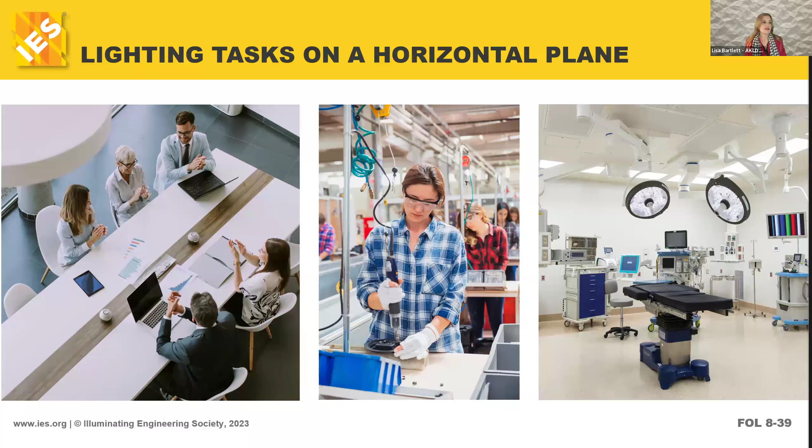But that's not the whole story. So one of the things that is equally important, and in my mind, even more important, is lighting on a vertical surface. Last week when we were lighting up the walls, and if you recall, we were doing the test of the wall wash distribution that was slightly softer, sort of smoothed out the masonry a little bit, versus the grazers that had that really sharp rake of light that really popped out the texture. Both of those were providing vertical illuminance.

And our eyes do perceive light on vertical surfaces first, because what did we evolve doing? Looking out and scanning at the horizon line, looking for game, looking for whatever food we could collect, looking for something that we wanted to run and avoid. So that's what tells our eyes what's brightest first, is what's on a vertical surface.

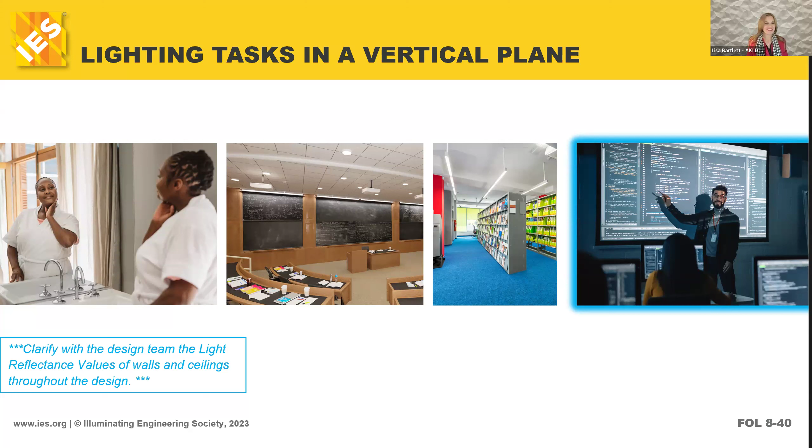Come on, PowerPoint, you can do it. There we go. All right.

Last week I had wanted to mock some things up, but this is something that you can do really readily at home. Next time that you have a magazine, if you can grab one, hopefully it's nice and glossy, take it and take your cell phone flashlight and just do a demo where you turn on that flashlight. I'm going to turn mine on, turn on the flashlight and aim it at the magazine.

Now, who's played pool? Has anybody played pool? Good at bank shots? Yes, I see some. Yeah, why am I not surprised? I thought this might be a crew that would know the old angle of incidence equals angle of reflection rule that is best learned through playing pool. Same thing applies to lighting. So the angle of incidence is the angle of reflection. The exact same thing you're using for bank shots is exactly what we use to think about the way that lighting is reflected off of surfaces.

When we have a glossy surface or a light colored surface, if we have light that is, and hopefully you can see my mouse, bouncing off of a bright surface and into the eyes, that's going to be really uncomfortable. You can test that yourself by holding your cell phone at different angles and seeing where you get that reflection off of a magazine. I encourage doing this because anytime that we're lighting task surfaces, we need to think about that angle of incidence equals angle of reflection. And it's not just into people's eyes, it's to computer screens as well. Thankfully, our monitors are way better at making sure that they don't pick up the direct reflections of light, but we want to be thoughtful.

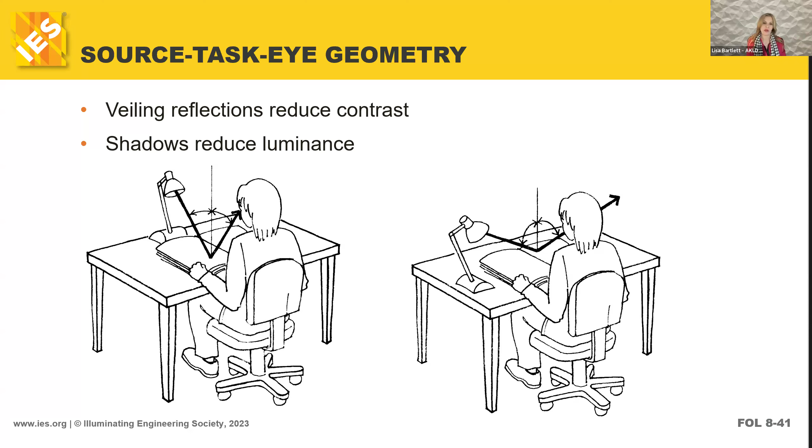Now we get into the meat of it. Last week, I issued the invitation to study the IES, either the Illuminance Selector online, or if you have the handbook, which would be 10th edition, which, if you're lifting it, you don't have to go to the gym because it's fat and heavy. But there are illuminance tables. Did anybody have a chance to look at these, or has anyone done that as part of their daily course of work? Cool. It's an awesome introduction.

And for those of you, I'm going to pull a screen over. If you have access to the IES lighting library, this is the illuminance selector. There is actually an illuminance selector function. So if your firm has a membership to this, then you can go in and actually search these charts online. And it's frankly fabulous. It's such an improvement over digging through the handbook, whether physically or electronically. But let's break this down. This is really important to know.

First of all, I want to highlight that these are recommendations and guidelines. These are not codes. These are not standards. There is no immediate and direct legal implication like there is with path of egress lighting if you do not provide these light levels. There's a precedent in all of these where it says these need to be evaluated specific to the project, to the user group, the context, the usage, the energy. So always a guideline and a starting point, not a rigid code. So this is actually simpler than it looks.

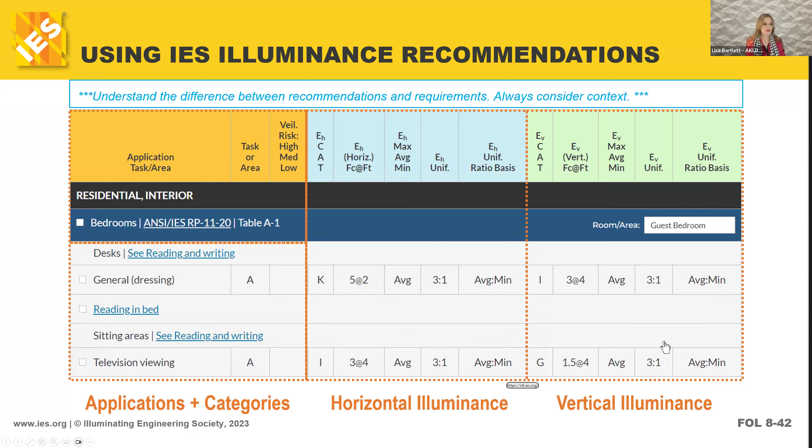And it's interesting that the uniformity and the average to min are exactly the same, which frankly makes total sense for television viewing. We don't have a horizontal task. We don't want a lot of light on the vertical surface because the TV is providing that, maybe just enough that we don't have super high contrast, a bright screen, dark wall. So that's how we read the chart. Is everybody following that? So far, so good? Okay, awesome. So next is your turn.

Let's cruise over to an example. Let's take a look at a library, the general book stack. Actually, let's go down to shelving. That sounds kind of interesting. All right, so who can tell me what our light level is and at what height for the horizontal surface when we are at shelving? About 300 foot candles at 3 feet. Good try. If this was metric and this was lux, you would be correct. This one is in foot candles, and you've probably seen this chart previously in lux, so I have to check myself on that too. So 30 foot candles, you are correct with 3 feet.

How about for the vertical surface for bookshelves? What's our target illuminance level and at what height? It's a little tricky because it says TS, right? Like, what the heck is TS? That's the task surface. It's basically saying you got to have 20 foot candles up and down that whole shelf, man. You got to read the book spines at the bottom of the shelf as well as at the top. So what does that mean when you're doing that lighting layout and photometrics? You got to look at what's at the bottom, because that's where you're going to have the most light fall off. So if you can hit your 20 foot candles down there, you're going to be golden.

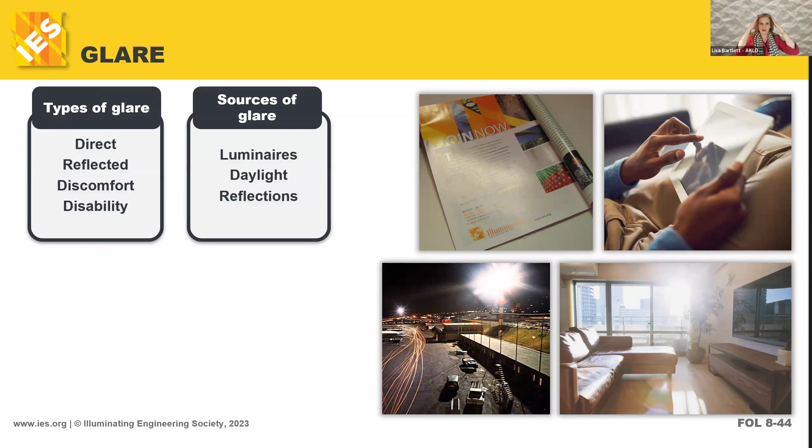Transient adaptation. Okay, who works in RiNo? Who has an office in RiNo, or who lives in RiNo or spends lots of time in RiNo? Anybody? Okay, well, I'm going to give you a field trip to try. And if you're out and about, it's right across from Bierstadt Brewing. It's on Blake. It's at 28th and Blake. There's a multifamily project there.

And they have a parking garage entrance, and the parking garage entrance slopes like this, and they have big surface disc lights on the parking garage entrance. Those lights are off during the day and on at night, and they put out a lot of light. Who knows what's wrong with this picture? Off during the day, on at night, because that's kind of what you normally want to do with lighting, right? If there's enough daylight, you want the lights off, and then after dark, you want them on. Why would it be different in this environment?

I feel like it's dangerous to go from it being super bright to super dark. So there should be, like you said on the slide right here, a transition when you're going into a space, because especially when you're driving a car, that's just dangerous. Yeah, great input, Madison.

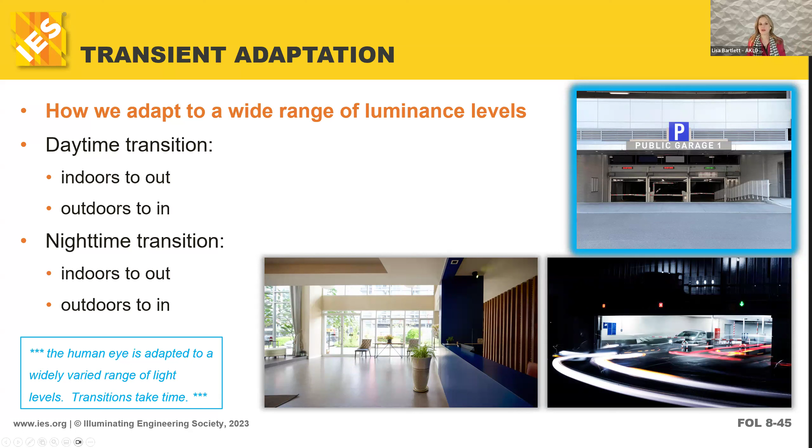So transitions take time, and the older we get, the slower our eyes transition. One of the many indignities of aging.

All right, we're going to keep cruising. As you can tell, I can yak about this stuff at length because it is so fascinating.

Luminance and luminance ratios. Okay, we already talked about luminance, so you guys actually have the clue of what that is. Luminance is the brightness that we see. It's that surface that is emitting light. So whether it's a lens or it's a shade or it's a lamp that is visible or it's actually a source inside, the luminance is that bright light emitting surface. And then on the table, we have the illuminance. That's the lighting on the surface.

So the luminance ratios are super important when we talk, especially like think about a computer monitor. You guys are going to get this in a heartbeat. If your computer monitor is superimposed, or you have a screen, your tablet or your phone, and you've got a really, really bright window in the background, and you're trying to see your screen, or even if you're just trying to look at your phone out in bright daylight, you've got to raise the brightness, right? So that's the exact same thing we have to think about when we're doing lighting.

We need to almost think in the same kind of vocabulary. You want to either lower the shades on that window so we don't have as much luminance, because the bright window surface is actually measured in luminance, or you want to brighten the output of what you're looking at. So brighten your screen. Those things are really, really important. And especially if we're doing any daylighting, the brightness on those, whether it's a skylight with film on it or it's a window, we want to be aware of luminance.

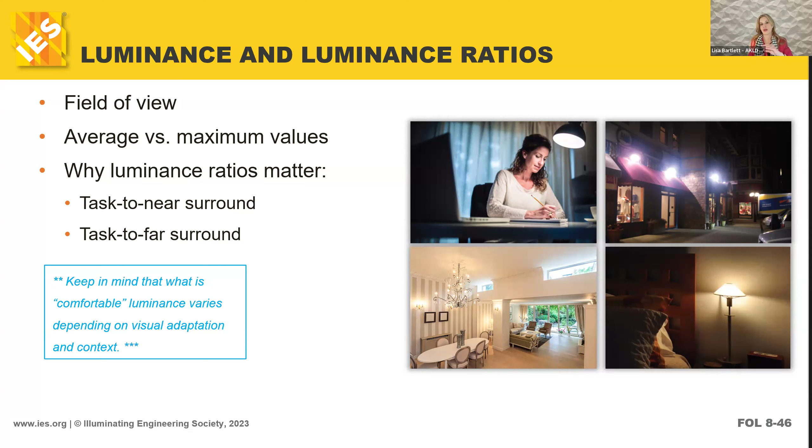It's really uncomfortable. So if you are being asked to consider really narrow lensed fixtures, be very, very careful about where they are in the field of vision and be very, very cautious about how much light you push out of those.

I had to have that conversation with lots of architects before. Sometimes I win, sometimes I don't.

Anyway, there is also glare shielding and cutoff with sources. And when we're talking about a cutoff angle, this really just means that it's the angle, like this tells it all, right? From nadir, the lower that angle, the more comfortable you are; you don't see the light inside the light source. And then the shielding angle, that's from horizontal. So it's just the difference from horizontal and vertical.

And we've all seen downlights where they've got a lens right at the ceiling, and there's no comfort. You're seeing that bright surface from anywhere in that room. When we have a recessed source, we have a much better cutoff, and that way we're seeing less of that source. So when considering luminaires, think about the environment. You want to think about the shielding angle and the glare, because if it has really high visual sensitivity, you want to make sure that that source is pulled back.

And that's why puck lights, people are like, oh, it's a downlight. Well, it is a downlight, but it's just smacking that high luminance surface on the ceiling, and that's not really visually comfortable.

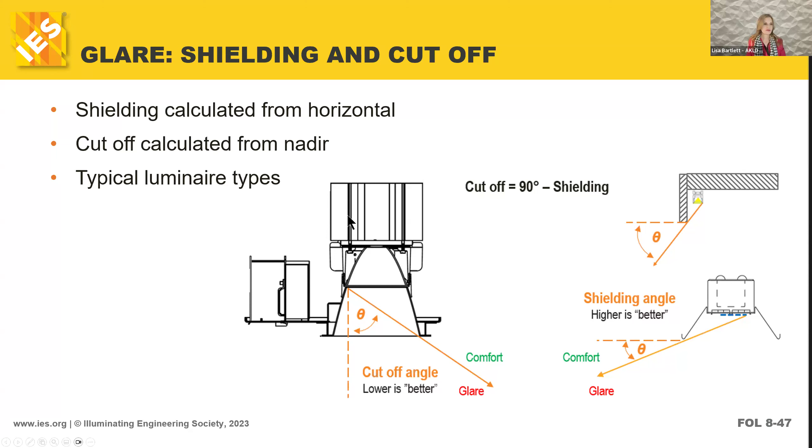All right. Unified glare rating is thankfully something that we're hearing about more and more in the world of lighting. Europe has instituted this standard, and it's a measurement that is used to indicate the level of glare in a fixture. However, there is no universal UGR for a luminaire. It is always a measurement based on the mounting height combined with the viewing angle to the luminaire.

So while there might be some average scenarios where a manufacturer says, hey, in this application, when you have it at 10 feet and you're at a 45-degree viewing angle, like you're at a desk and it's a few feet in front of you, here's the UGR rating. But it's never universal. So just know that there's no one size fits all UGR. It's always an equation based on mounting height and viewing angle.

Does anybody know the magic UGR number that is considered the accepted standard for, wow, that's really low glare and it's going to be really comfortable? For some reason, I feel like it's 17. Super close. It's 19. And that is what shows up in the WELL Building Standard. It's actually in the electric light glare control portion of the standard.

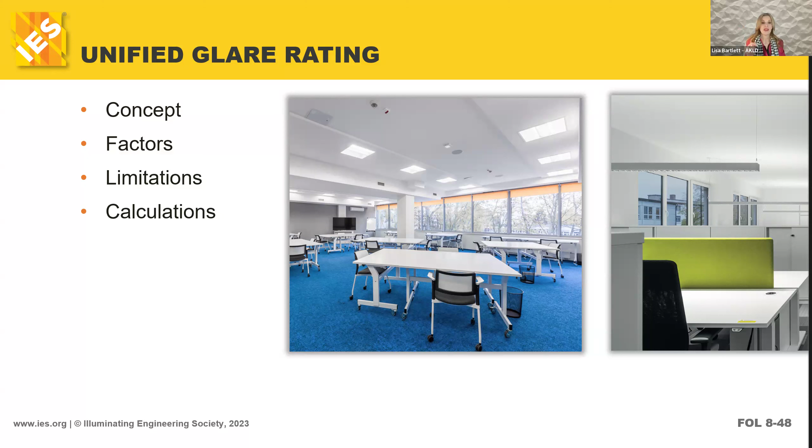It's pretty compelling, that story, and we're doing a lot better now in general about paying attention to glare and less about how many lumens per watt we can push out at the sacrifice of visual comfort. We can't sacrifice efficiency and create a huge amount of glare along the way. That actually can cause migraines. So definitely not a winning situation.

All right, we did talk about contrast last week, and if you remember, I had mentioned that in lighting for retail, you want to make sure that you've got a 10-to-1 ratio. So again, this is not 10 footcandles and 1 footcandle. It's just a ratio. If you've got 100 footcandles on the sweaters, you want to make sure that what surrounds those is about 10 footcandles, so the sweaters really pop.

The more precious the materials, so crystal and jewelry, fine material highlighting or artwork, really small items, we actually want an even higher ratio if possible. And it's got to be at least 3-to-1 to catch our eyes. That's actually still relatively uniform in the grand scheme of things. So I wouldn't do retail anywhere less than 5-to-1, and 10-to-1 is really where we like to start. It's going to actually draw people's attention.

It's going to help with wayfinding. The old department store methodology was basically creating higher levels of illumination all along that path. So you have to walk past all the displays. There's no easy way to circulate from one place to another without walking past all the merchandise. And the lighting really helps with that.

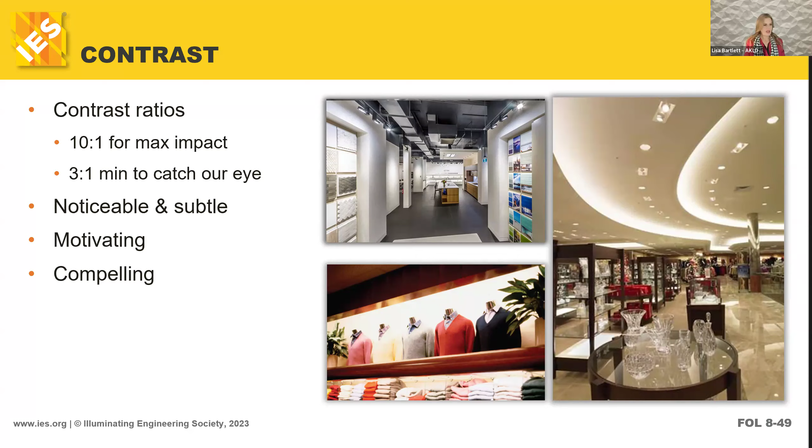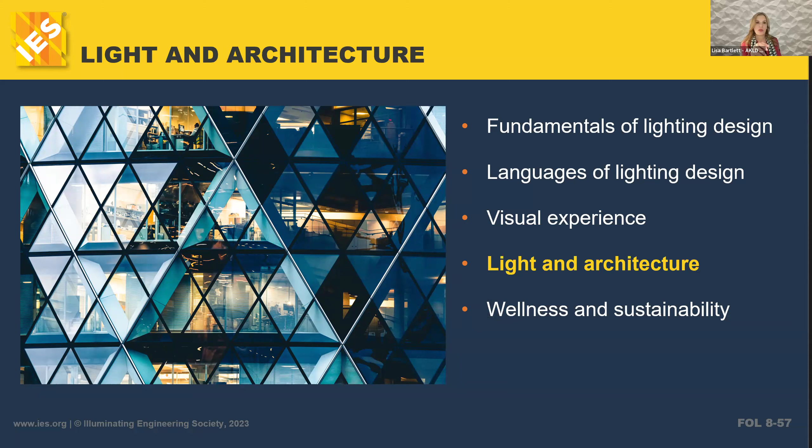All right. Yes, here we go. I wasn't sure if I skipped a bunch of slides, but we are cruising on. We are moving past visual experience. We're going to talk briefly about light and architecture and also a little bit about wellness and sustainability, and then we'll be pretty close to the end of interior lighting.

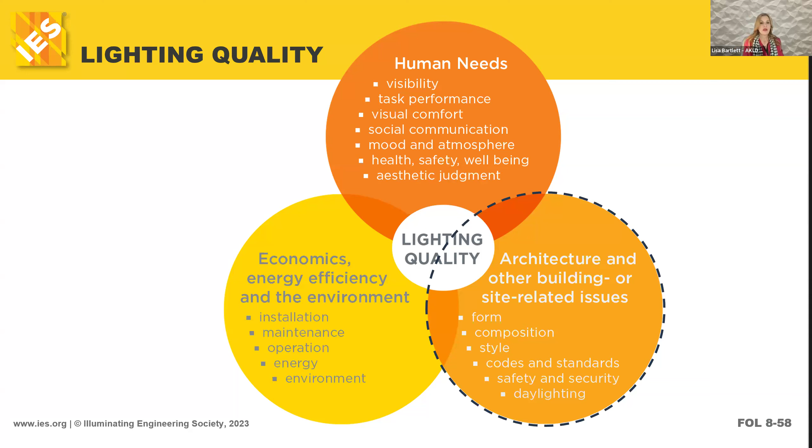This was the first slide we looked at last week, and it's important to bring it up again. Lighting quality is not just a function of the task requirements or human needs. It's not just a function of the visuals and the architecture. It's not just a function of energy efficiency. It's all three. And it's where we meet in the middle in that Venn diagram that we really have the best lighting outcomes.

So when we look at lighting in architectural spaces, some of the things that we want to be thinking about are how are we going to integrate lighting? Can we do that in clever ways? This was a heavily detailed cove light that was illuminating a ceiling. This was for a senior living environment, and we wanted to make sure that we had bright ceilings, but we didn't want any visibility of the sources.

Similarly here, we wanted to graze down these gorgeous travertine walls, and it took a lot of detail coordination to get that light into that pocket, where from very long distant viewing angles, and those are up high, we wouldn't be able to see that source. Those things took a lot of coordination with the architecture. You can see some other examples in these images. So we want to be very clever in thinking about ways that we can integrate the lighting within the architecture, whether it's an uplight and we're coordinating structurally.

This is at the Four Seasons in Lower Manhattan, and we designed these really interesting custom luminaires that define very small changes in ceiling height. We also can use our lighting not just to be hidden in the architecture, but in this instance, we were accentuating. Yabu Pushelberg wanted to have these very small, subtle changes in ceiling height in the lobby, and we actually took the luminaire and created forms that emphasized that, just sort of punctuated it. So we can do both.

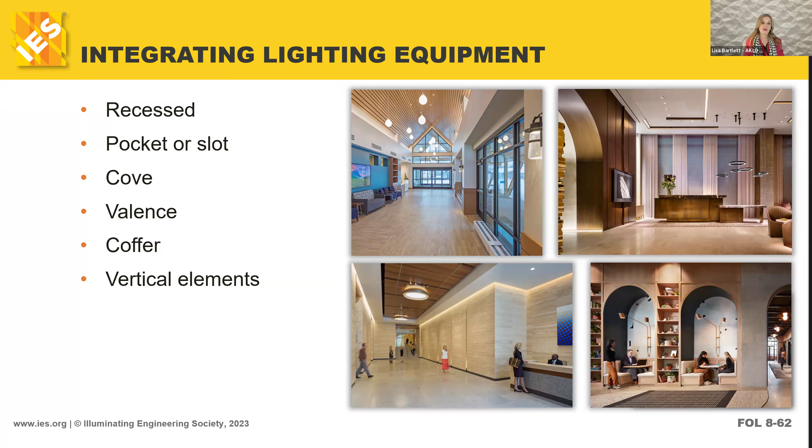So question for you guys. As you're thinking about lighting, if you've been asked to design lighting or come up with solutions or run foot candles in a space, how are you thinking about things like ceilings and graphics and materials? How is that registering for you? Do you like to think about maybe illuminating ceilings when there's something really soaring like this or this space, doing uplight, kind of emphasizing the architecture, or maybe highlighting graphics that help with wayfinding and visual interest?

We want to think about all of those things and think three-dimensionally. And the more that we have drawing instruments that can help tell the story so we understand what's happening in the space, the better. One thing I did want to point out, when running photometrics, one of the things that I've seen a lot, and it's really very impactful in our experience in the space. So this isn't just about photometrics, it's really about thinking about the lighting and then being sure that the lighting that is in a space works, is the reflectances in the space.

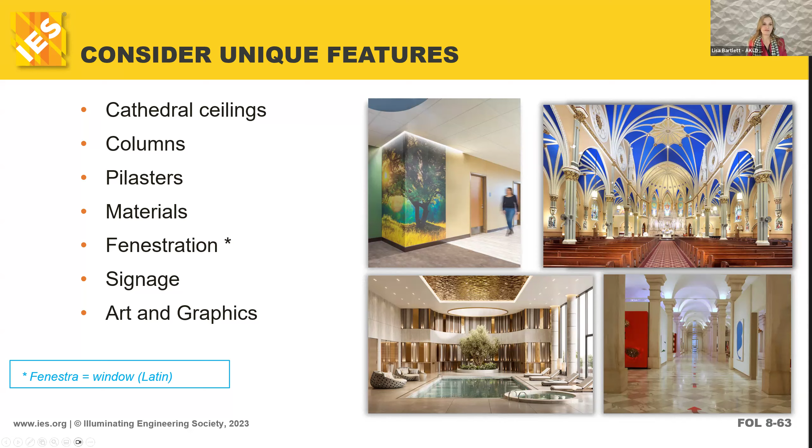All right, wellness and sustainability. We touched on this briefly last week, but circadian lighting, or lighting to support the circadian system, whether it is the actual neurological effects or psychological, we just understand that time is passing. There's a lot more attention to that happening in the world of lighting. Has anybody seen any presentations on circadian lighting or dug into that? Is anybody excited about that topic?

Chris kind of did a little bit of that. Was that last week? Yeah, it must have been maybe last Thursday. Did Chris talk about that, or was it two weeks? Maybe it was two weeks ago. Was it two weeks ago I saw you guys? I can't remember. Time flies. Time flies when you're having fun. Clearly we're having fun. Last week sometime, yeah. Last week. All right. Well, good.

I'm glad that you had an introduction to this. This is something that I find really fascinating and quite motivating. The IES has categorized some things to help us understand what impacts circadian rhythms. There's a new RP that's out that addresses this, but there's a white paper that was like watching paint dry to read. And I have a pretty high appetite for understanding the circadian system. But one of the things that came out of that, over 10 years ago, was the definition of these five things. There are actually six, but five understood and accepted things that really impact the circadian system.

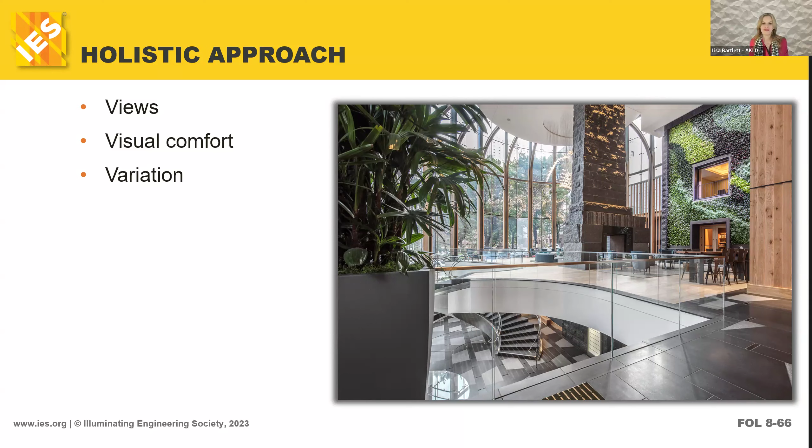So when we're lighting sustainably, it's not just about the energy. I think we've all become pretty savvy about lumens per watt, and we continue to move that theoretical max up. Now we need to be thinking much more about the human experience, about the materials in luminaires, and about the durability of the installed lighting system. LEDs have been around long enough that we're starting to see wide scale luminaire failures. Our lighting industry really needs to get wiser about what I call circularity, the more accepted term beyond sustainability.

TM-65 and TM-66 address the longevity and circularity of an entire installed lighting system. If the driver fails, is it in a place that can be easily accessed and replaced? Is that driver still available to be replaced, since that's the likely first point of failure?

If there are components within the luminaire that fail, can the components themselves be replaced, or do you have to rip out an entire luminaire, and what happens to it? It probably goes in the landfill. Plus, you got to patch a hole in the ceiling. This is the antithesis of sustainability.

So our company is looking very, very much and significantly and challenging manufacturers more and more about the ways that they're thinking about circularity and durability of an installed system. Some are taking the approach of designing the most robust system ever, that they hope no one has to get into it. And so there isn't a modular component to be replaced because they don't want anyone replacing it.

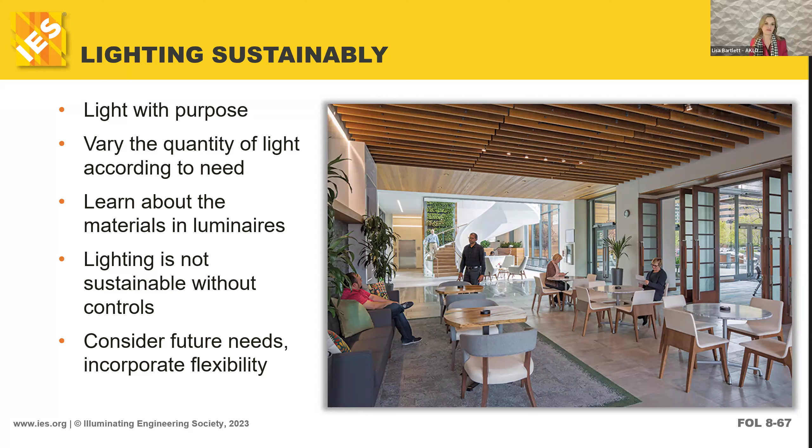Please, as you are working with manufacturers or you're in your company, if you are a manufacturer, challenge them to tell you their story about circularity and how they are thinking about this, because it's no longer about the day one energy spend. It's about that whole system over its entire life cycle. And when some component does fail, how is it going to be replaced? All right.

Few more things about sustainability, daylighting. I know we're in here talking about electric lighting, but the more that there's daylight, the better. It has to be controlled for glare and for heat gain; we've got to have the right glazing systems for that. But letting daylighting be our ally is one of the keys to sustainability as well as wellness. So that helps us with our circadian adaptation. It helps with connections to nature. That helps with positive affect. So all of these things are a total win.

And controls, I know that there's a whole section on controls. Have you guys had the controls module yet? Not yet, no. Oh, okay. That's going to be so brilliant.

It's so important. Thinking about luminaire design or lighting design is only half of the equation. We got to think about controls design. And in sustainability and in circadian lighting gestures, it doesn't matter what you do with the lighting if you don't have an equally defined, usable, and well executed lighting control strategy. So please, please, please pay all the attention to that and enjoy that one.

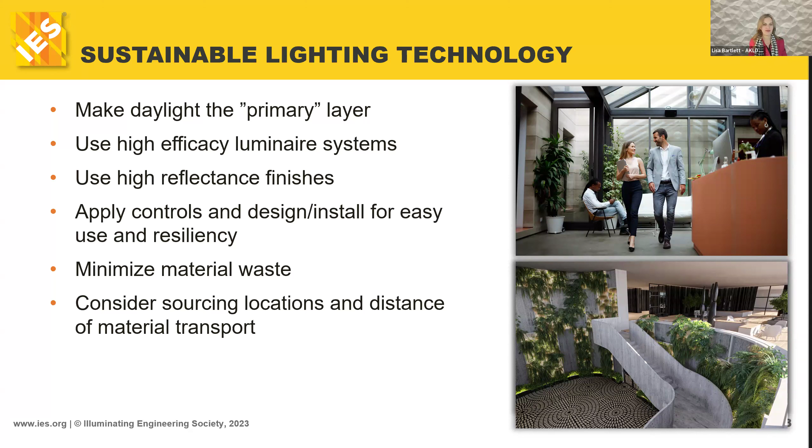All right, so we're going to just kind of recap on the visibility component here. We talked about all of these items. I know it's been a minute since we started with tasks here today, but just a reminder to try and borrow a foot candle or illuminance meter and walk around with it vertical, horizontal, day, night, inside, outside, and you'll be astonished at the wide range of light levels.

Play with that mock-up with veiling reflections and glare, shooting a flashlight on a glossy surface. Play pool: angle of incidence equals angle of reflection. Shoot it so that your angle of reflection is going to go into your eyes. It'll be a great object lesson on glare.

See if you can get a login for the IES lighting library and go play around with the illuminance selector. And by the way, if you have the IES lighting library, you also have access to all of the RPs and LPs, recommended practices and lighting practices. And those things are really fantastic. They'll give you a lot more information about all of these elements. We did talk about glare, adaptation, uniformity, luminance ratios.

Are there any questions? I know that's a lot of stuff and you're probably just soaking it all in, but are there any questions on these components? All right, if one comes up, then feel free to lob it into the chat and we can come back and address it.

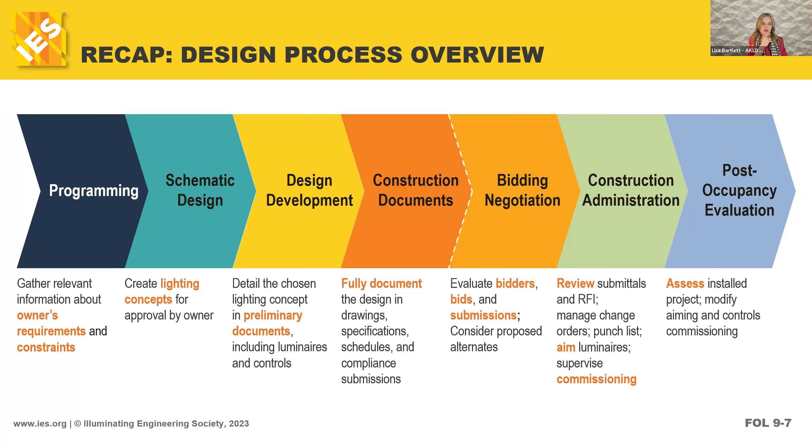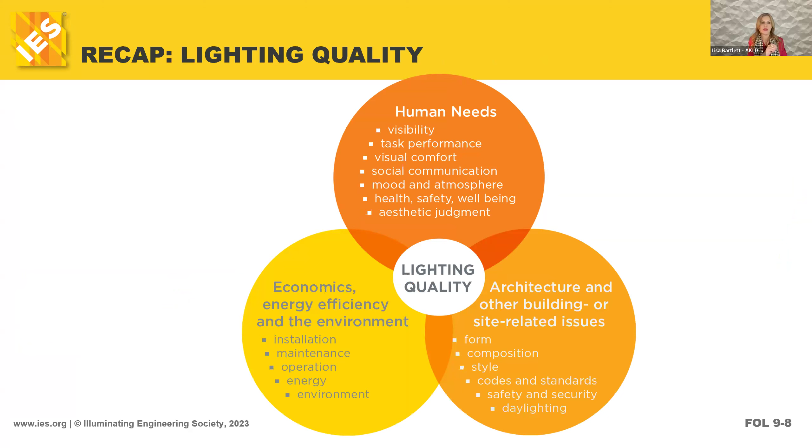In dark exterior environments, typically we're talking about these at night. Sometimes there are spaces where we do need lighting in the exterior during the day, like tunnels, but that's a bit of an exception. So we're going to take this more as broader ambient nighttime illumination. So one of the big challenges with exterior lighting is that unlike interior lighting, which is contained, exterior lighting is not. So there is no containment unless, again, we are in, for instance, a tunnel or something that has a sort of room to it.

And there are spaces like that after dark, and some that are semi-contained, like pergolas or spaces that have semi-open slats. But we need to be super concerned about having just the right amount of lighting, and also being careful about how we are containing that within a property, or making sure that we don't create light spill. So go back to the lighting library. There are a lot of TMs, or technical memorandums, and design guides.

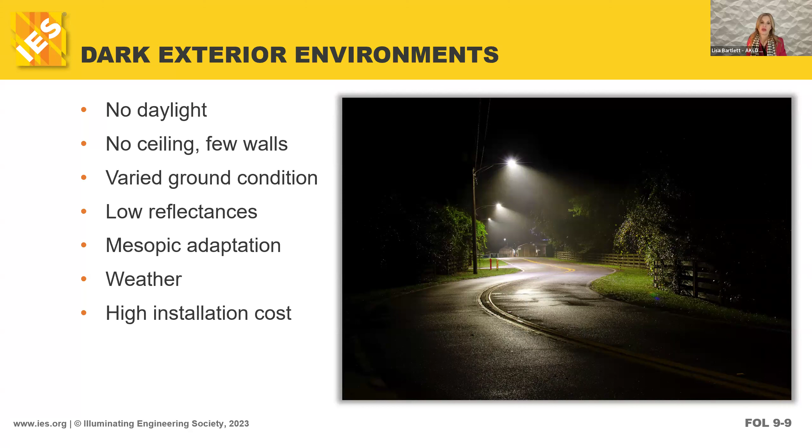There's a recently introduced design guide about lighting for people in the environment after dark that came out in the last few years. And Nancy Clanton, she's sort of the fairy godmother of lighting, with an engineering focus. She used to live in Boulder and started Clanton and Associates. She helped author that, and it is really well written. It's actually enjoyable to read, so I would highly recommend checking that out and becoming more familiar with the guidelines for exterior lighting design. Of course, you'll get the intro tonight.

When we think about lighting in exterior environments, we do have some conflicting needs. I think healthcare environments are a really good example of conflicting needs, where even though we didn't talk about this specifically, your needs and wants for lighting as a patient are most likely very different to the needs and wants of the medical staff and the caretakers, who most likely want brighter levels of light, where you probably want something that's more visually comfortable and softer.

Similarly, at night, when we think about cars and motorists, they are going to want more light, where we as humans, from a comfort standpoint, are going to want less overall light in that space. And so there are multiple perspectives we're trying to deal with, and we do have safety considerations here. So it's not just about visual preferences, we have to be very diligent about safety.

All of the things that we've talked about in the interior environment are important in the exterior environment as well. So we do need to be considering things like pedestrian safety. We need to think about people who are driving vehicles. We've got to think about safety and security, as in minimizing unsafe environments at night. We also need to think about light trespass and light intrusion. So we do need to consider some additional things.

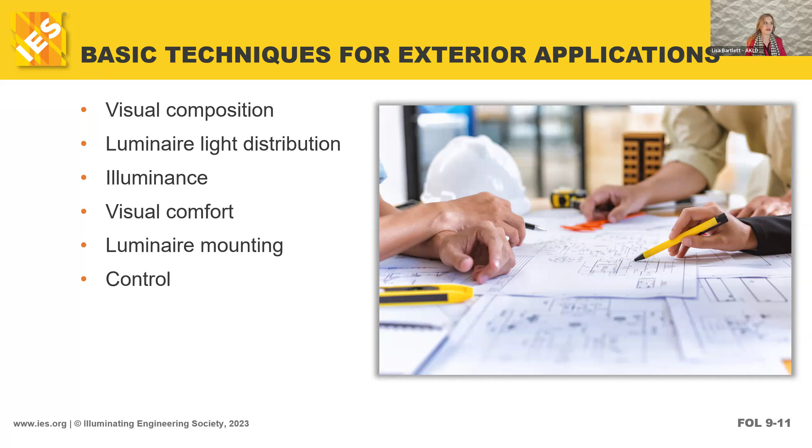There are caps on the amount of light that we can have in the exterior environment that are presented to authorities having jurisdiction. And depending on where you are, it might be 10 foot-candles, it might be 8, it might be 5. And that can be tricky to cap those maxes and still get the uniformity and have the light where you want it. So all hugely important things as we're moving through.

But let's start first with the visual piece. Let's talk first about the composition. Let's set aside the calculations component for a minute, and let's talk about the same thing that we talked about last week on the interior. We can look at ambient lighting, we can look at task lighting, we can look at accent. We use a little less sparkle in the exterior environment. There just are, I think, fewer opportunities for that, and it's a little less appropriate, but we can do some beautiful things with accent lighting.

So if we think about Richard Kelly and his ways of lighting, what are some of the opportunities that you see in the exterior environment to apply some of these different types of light? Ambient lighting is pretty easy, right? Those could be ped poles, or if we're not talking about parking lots necessarily, you could have kind of a uniform path of ambient light just to get you from here to there using something that's a little bit taller, or even using bollards, right?

What about task lighting? Where would you have a need for task lighting in an exterior environment? Roadways. Yeah, that's actually a really good point. So depending on what the roadway is and where it is, if it's for instance a high speed interchange, then yes, there are going to be task lighting requirements about that. And could we call it ambient? Yeah. But it is also task because it's defining where some of those turns are.

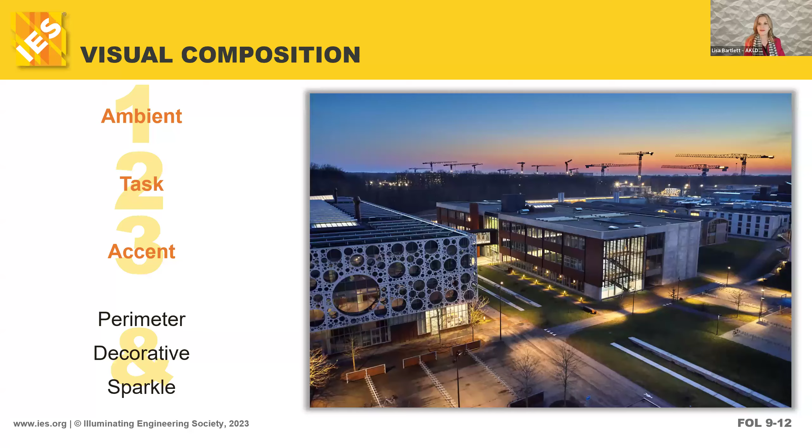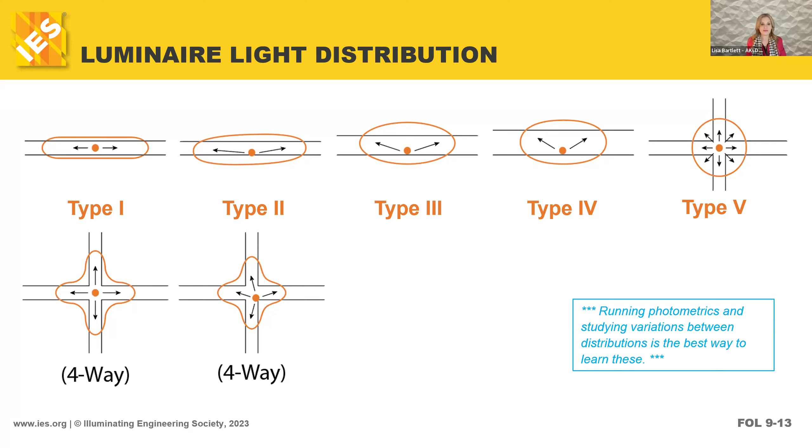We talked about illuminance for the interior. We have the exact same considerations in the exterior environment. Horizontal illuminance really is the primary thing that we look at in exterior environments, right or wrong. Now, at a property line, especially if LEED is being considered, we want to think about the vertical illuminance throughout, but especially at a property line, understanding what you have vertically and not just horizontally is super important as well.

But we do like to see uniformity in exterior environments like parking lots and roads. Uniformity is hugely important there. Vertical illuminance, while we're not necessarily doing a lot of sports fields, who can tell me the single most important need for vertical illuminance in the nighttime environment? And I'll give you a hint, it has to do with safety.

Have you ever been walking on a sidewalk and there's some glary light over there and that whole thing is really bright, but there's someone walking towards you and you can't see their face because the light is like this glare bomb, but it's not actually illuminating their face? So that's a problem in the nighttime environment. We want enough vertical illumination in areas where there are safety considerations.

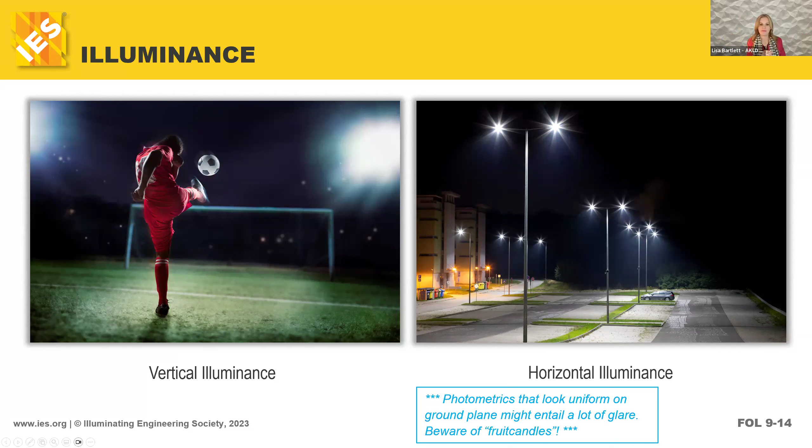Visual discomfort is a good word for it. That is an unfortunate feature of a lot of luminaires at night. I'm working on a project right now where I really love the engineer. I think it's easy at times to say, well, I'm going to put this 10,000 lumen fixture on the side of the building because I don't have anywhere convenient to mount a pole light, and I'm going to shoot that light into the parking lot. And now I've got great foot candle levels on the ground in what would have been this dark corner of the parking lot. And I had to say, respectfully, I think it's going to blind everybody.

Let's talk with the landscape architect about adding a pole in that courtyard so that we can have more localized light, and you can use something that's 3,000 lumens instead of 10,000 lumens. And by the way, it has a much sharper cutoff than that wall pack that was shooting at like a 45-degree angle into a parking lot. So we want to think about having that light directed, and we want it to be directed down. So the higher the aiming angle of the light, the more visual discomfort we're going to have.

We want it shielded. So instead of having drop lenses that have high luminance on the lens, like these guys have high luminance, this guy would have high luminance. This would have high luminance. This could potentially have high luminance on that lens. We want to tuck that light up and make sure that we don't have these glowing, bright orb type surfaces. And then we want to make sure that we're diffusing it properly so that we don't have really harsh, sharp, tight beams when we need a broader distribution. So we want to make sure that we're limiting the amount of light that's coming in the direction of the eye. That's really the most important component here.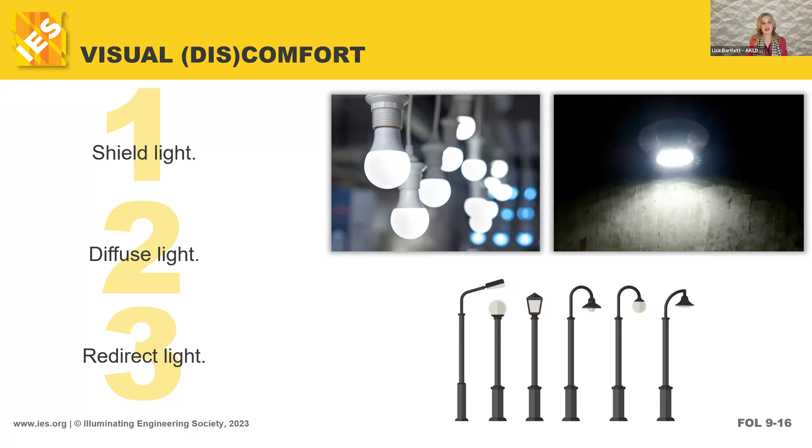So if you have the same incident amount of foot candles or the same luminance on a lens, if it is a cooler color temperature, again, it's a logarithmic relationship, the same foot candle level will be perceived as up to twice as bright in a much cooler color temperature than a warmer color temperature. And that can equate to visual discomfort at night and higher perceived glare. So that was actually a great example, Liz. I know you were digging deep there, but you nailed it.

So way to go. All right, so luminaire mounting is super important as well. These are kind of funky and fun.

You may love or not love the pattern, but we're not going to have a lot of visual discomfort from something that's this low. We're not going to have a lot of visual discomfort from something that's this warm, this diffuse, and this kind of low light level. We might, however, have a lot of visual discomfort from something like this, depending on the brightness and where that's aimed. Those are full cutoff fixtures because you can see this nice sharp rake here. But if you're approaching this, that might be somewhat uncomfortable.

And certainly a pole light like this, you could actually just see the scatter that's captured in the photograph itself. Well, that's because there's some humidity in the environment when this photo was taken, but the mounting height is hugely important. And mounting height in the ground doesn't exempt you, because if that light has a really broad distribution and you're walking up to it and you get an eyeful of LED, that can be uncomfortable. So we want to keep all of those things in mind.

And mounting height in general, the lower the mounting height that we can use to achieve the purpose within reason and still maintain uniformity and distribution, the less we're going to see that spill light. The counterpoint to that is that we do have less uniformity on the ground, because the closer the source is to the ground, the more we have hot spot falloff. So it's always a balancing act.

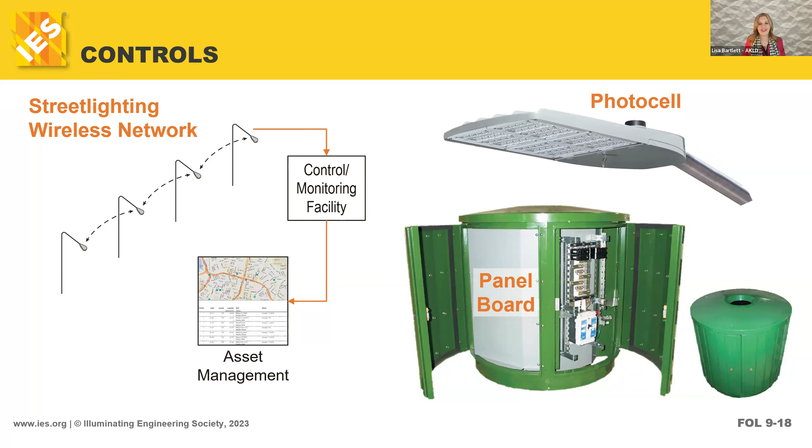So far, so good. All right, is everybody awake? You guys with me? I know it's 7 o'clock, it's snowing. Hopefully everybody's awake. All right.

So when we take a look at codes, we've chatted about that just a little bit. These are constantly changing and new codes are adopted in different jurisdictions all the time. And frankly, it's important to know if you're working on a project if there is a specific code that is the target for design; the architect should be able to inform on that. It is not just energy codes that are important to consider. So I've mentioned some things about the regulatory environment and being aware of different municipalities' codes.

Can anybody give me an example of that in Denver that affects exterior lighting? You guys are a shy crowd tonight. So I will tell you what it is. If you've heard the term SDP or site development plan, has anybody heard that? Conversations of, oh, we've got to redo the SDP, and it's the photometrics that are associated with the site overall. And if it's Westminster, it's the ODP. If it's Boulder, it's Tech Docs. It's pick your alphabet soup. Those are all terms for regulatory submissions that show photometrics on the property, on the site.

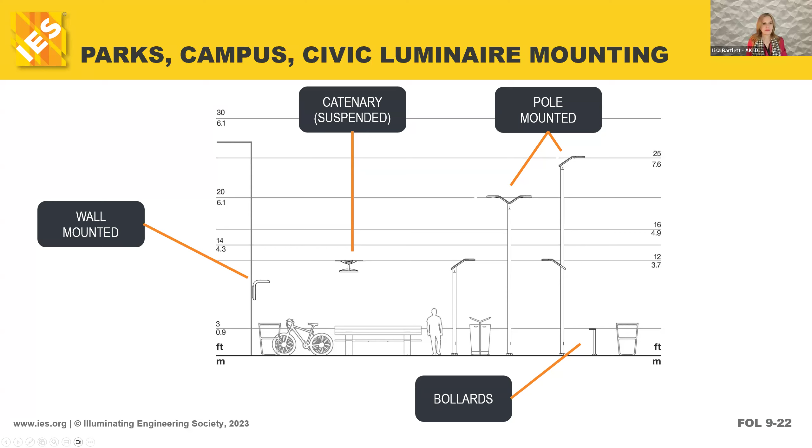All right, let's talk about seeing like a pedestrian. So limiting glare is one of the most important factors in a successful outdoor lighting installation. And there are several different kinds of glare. There's discomfort glare that is just like, that's uncomfortable in my eyes.

Disability glare is actually where you end up with so much pupillary constriction that your eyes are taking in less light and you really can't see. You know, you're literally blinded. When someone says, "Oh my gosh, I'm blinded by that," it's no joke. That is disability glare. So we want to make sure that we are careful about the way that we're placing light so that we're not creating too much glare.

By the way, humid environments where we end up having this sort of diffuse ball of light can be very atmospheric and beautiful. When it turns into moisture that's on the ground, we end up doubling our concern about glare because we now have a reflective surface on the ground. So that's a really important thing to consider if you're in an environment that has a lot of moisture and a lot of rain. Do think about any luminaires that you are placing, what they're going to look like when they're reflected off of a wet road, a wet sidewalk.

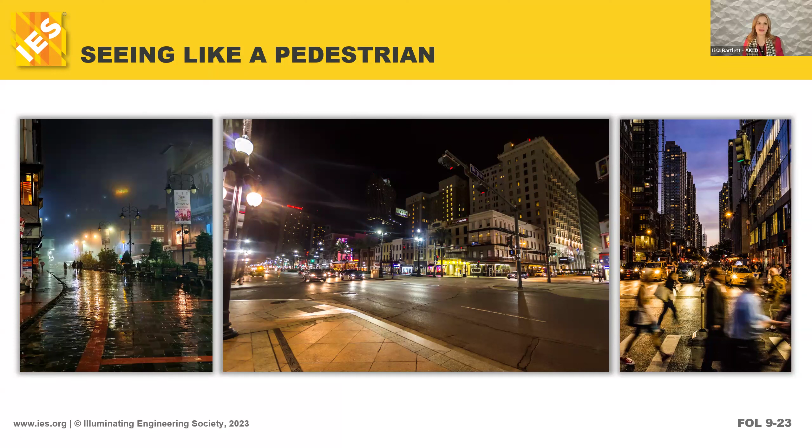All right. So pedestrians are moving at a slower speed. And we're certainly thinking about safety. We're thinking about people who are coming our way. Can we see them? Vertical illuminance is important. But when we think about being a pedestrian, I would say that seeing the horizontal surface is important. Seeing vertical, going back to that first slide, is equally important because we want to have good facial recognition.

So thinking about your time out and about as a pedestrian, what are some of the things that have been problematic for you? And by corollary, what are some of the things that you think would help that in the nighttime environment?

Their distribution for sure. Absolutely. Distribution, there are plenty of inappropriate distributions. And appropriate distribution, like these luminaires, they are not emitting light above 90 degrees. So you can see that the cone of light is down. That's great. In this, though, let me ask you about this. Do you feel like the illumination from these poles is distributed where it needs to be, or would you do something different?

I would do something different. What would you do? What would you do differently? I would make it actually in a way that instead of just lighting where the man is standing, it will light also the inside so that you can see on the inside. Yeah.

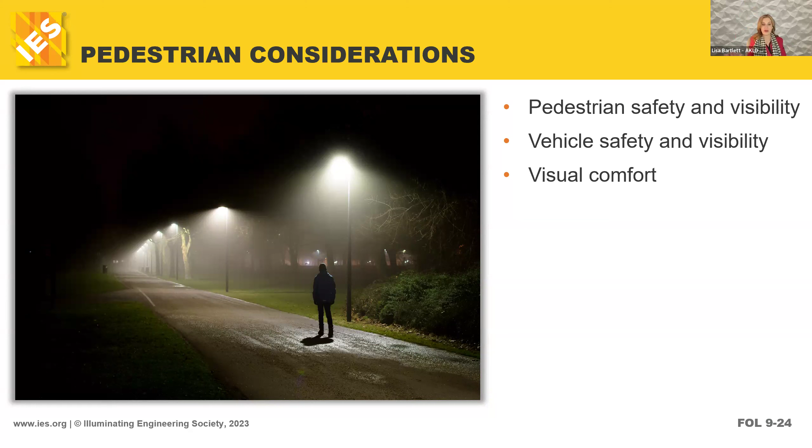Princess, it's a little muffled again. We really want to hear what you're saying. It's just a tad muffled, just so you know.

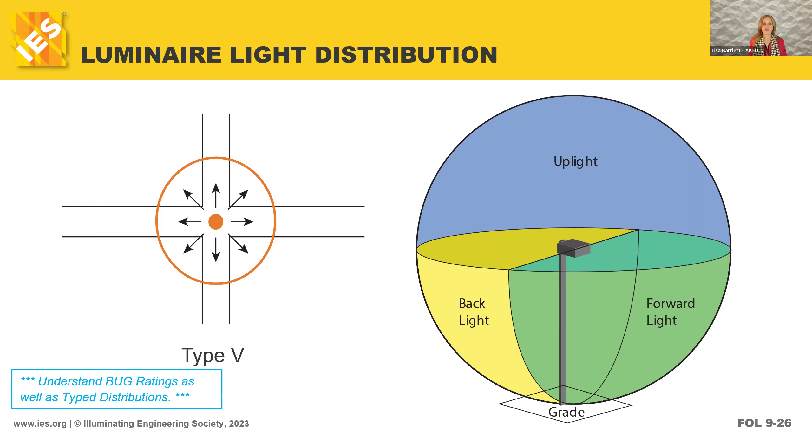But more importantly, they just help you understand, like, dude, am I choosing a fixture that has a really high glare rating? Maybe I should choose something else, because this is actually an environment where we want to be visually conservative. And that is Sustainable Sites Credit 6, light pollution reduction. So I would recommend finding the lighting zones. There are a lot of publications where you can look those up and see those excerpted. It's an important thing to know and be able to speak about lucidly.

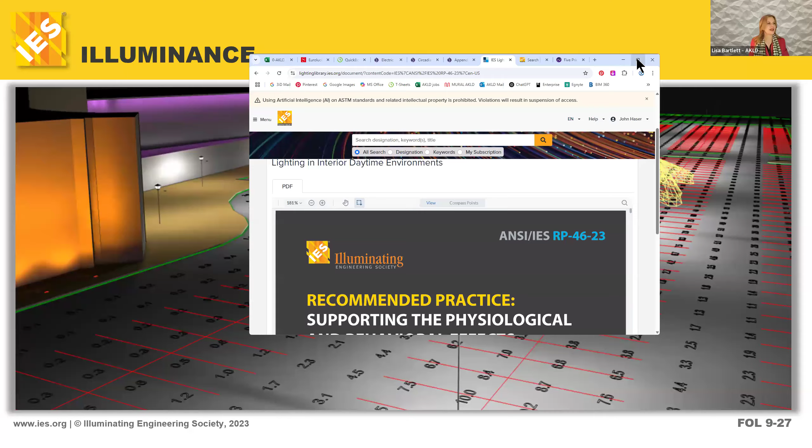lighting library. Let's just do this for a second. Let's look at parking. All parking lots. That is not exactly what I wanted to do. Here we go. We'll just go to parking lots and garages. Parking lots. All right. Let's do this again. All right, so all parking lots. Here is where our uniformity ratio falls. So 20:1 max to min.

So if we go back to this, we can see we're at 0.1 over here and we're at 10, that's actually a 100:1, right? So if it was 1 foot-candle min, 10 foot-candles max, it would be a 10:1 max to min. We're 100:1. Now, this again is kind of a fake. This is missing a pole over here, but the uniformity is most critical. And many people would strive to have more like a 10:1 max to min in a parking lot and consider that more successful. So uniformity is hugely important when we're designing parking lots and places where we want to have this feeling of a sort of safe blanket of light.

Now, keep in mind that when we've got a parking lot full of cars, there are different shadows that occur. And parking garages are another area where uniformity is hugely important. Who can think of a spot where we could actually navigate the outdoor environment pretty well without high levels of uniformity and that blanket of light? Do you have any ideas on that?

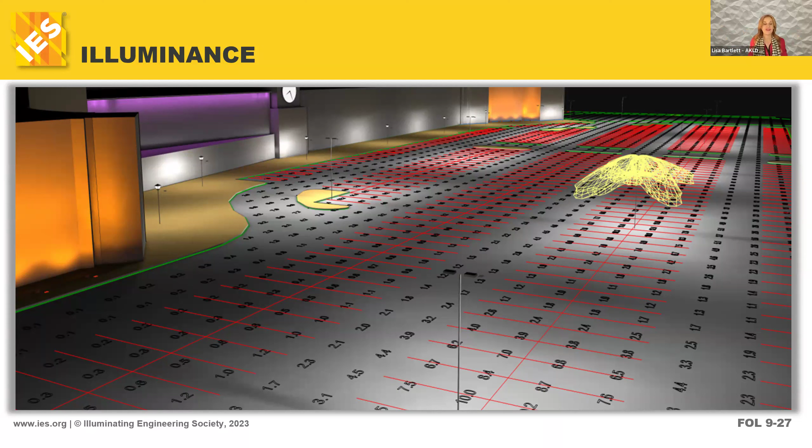So we can think about light as a directional cue, like just a beacon. It's a lighthouse. We can think about light that way. We don't have to have a uniform blanket of light everywhere. I want to offer that counterpoint to this.

All right, I hope everybody recognizes this slide. I have to tell you, I did take an illuminance meter out to the mall and measured the amount of light out there. And this was after walking around a good amount of downtown with the illuminance meter, where we were lucky if we were getting 1 foot-candle on average. Can you guess what the light level is at the ground on the mall with our UFO light fixtures here? Have you guys been out there after dark? Any guesses on the foot-candles?

2. Okay, we got a guess for 2. What else? Over 10. Yeah, 25. It ranges from like 11 to 15. It's unreal. And when your eye is adapted, even 1 foot-candle at night is a decent amount. Remember, full moon, 0.02 foot-candles. This is over 10 foot-candles. It's great when you're there and you're adapted to it. And when you come into it from not being adapted to it, it's utterly shocking.

That said, it is well distributed. It is controlled for glare. The little UFO ring was a holdover from what used to be a feature of the original design, and was kept as kind of this moment of sparkle, right? There's our sparkle in the exterior environment. So I think the design was executed really well, maybe just at a slightly higher volume than I might like.

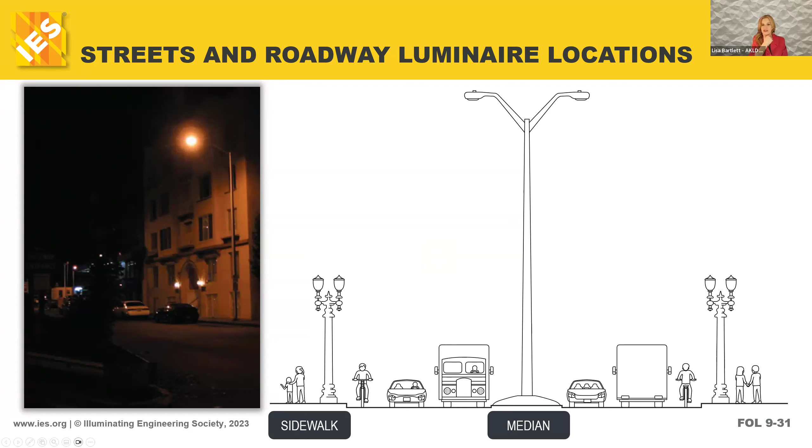Is anybody working on roadway lighting at all? Kind of a unique niche. So we did talk about seeing like a pedestrian. What's different if you are seeing like an automobile, if you're a driver? What's different than if you're a pedestrian?

We might say it's really the speed, right? So the speed of travel means that our response times are going to be reduced. And so if something's happening, we've got to be able to react quickly. So all the more important to keep glare at a minimum.

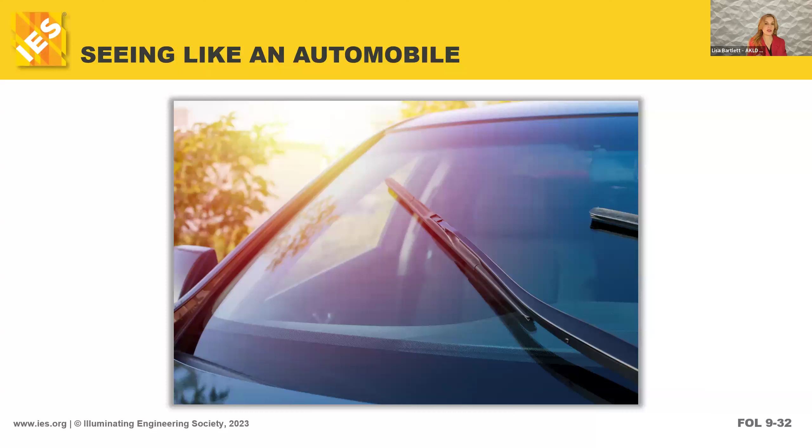And when we talk about task lighting, remember that example of a car, headlights don't turn. So a car that's turning across a sidewalk, or for instance, pulling into a parking garage and there's a sidewalk, making sure that you have illumination at that point is super important. So glare is a huge consideration for vehicles.

So roadway lighting, the thing that we want to do is really produce quick, uniform, accurate illumination. We do not want any drama. We do not want any visual effects. This is all about safety. No excitement in roadway lighting. So uniformity is king here.

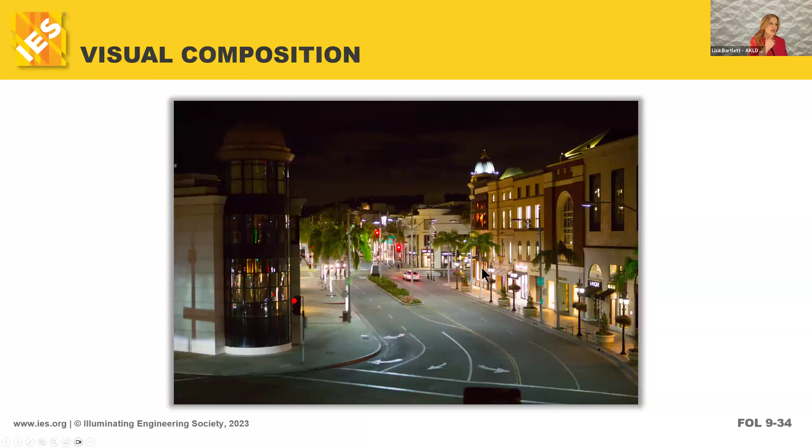You don't usually use a type 2 for something that's mounted this high, but that actually would have been a nice way to make sure that just the roadway is illuminated. These guys are just blobs of light. There certainly is no distribution from those ped poles, I assure you, when you have that kind of an acorn.

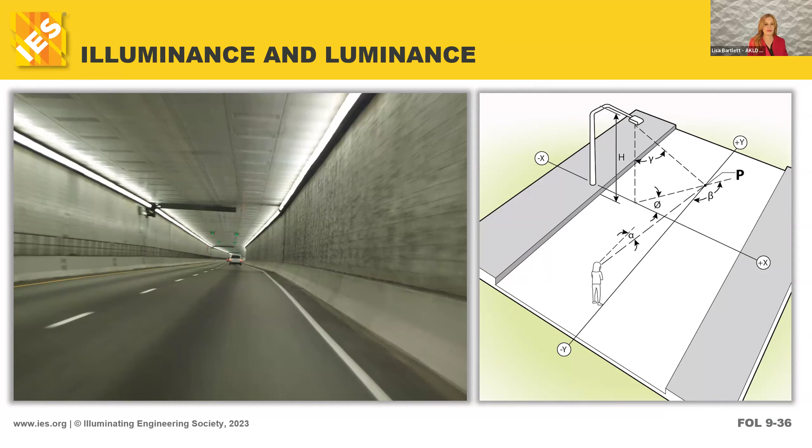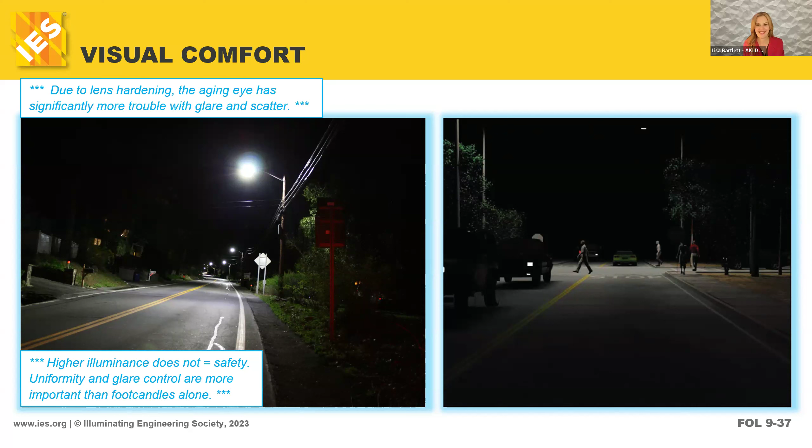So that was my opinion. Did anybody have a strong feeling, you think one is more comfortable than the other? I'm happy if you want to jump in and give a differing opinion. No, okay, no differing opinions. I get it. We're close to closing time.

This is one of the slides I was waiting for. I'm just going to give you a second to take in each of these images, because the pictures tell the whole story. This is why when people want to just mount fixtures that sort of shoot somewhere and say, oh, that's lighting for safety. That's exactly what was done in both of these instances. And how safe was that? How safe is it? Far better to have something that's controlled.

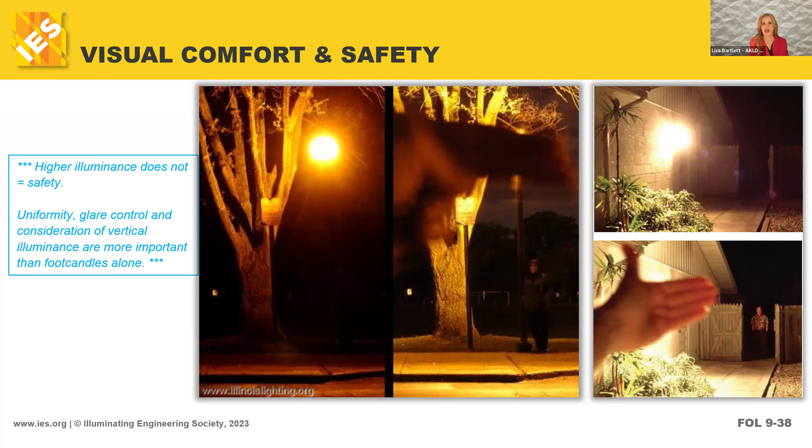And frankly, if there were some downlights in this soffit, for instance, as a counterpoint, that just raked down this bright white surface and bounced a little bit of light, you'd see all of this much, much better than by having this big blob of light. Likewise, if this had a much more protected cone of light that was bouncing off of this concrete surface, we would have much more meaningful vertical illuminance for facial recognition, which, remember, is our number one consideration for safety in the nighttime environment. These pictures, by the way, I've used in multiple presentations. They do a really good job of telling the story.

All right, we've talked some about parking lots, so we're going to move really quickly through this. We'll wrap up right at 8. So fear not, we're close to the finish line. I know you guys are. It makes for long days doing this a couple times a week. So I applaud you for your dedication.

So parking lot, I've said this several times. I'm going to say it again. Just because the photometrics look uniform doesn't mean it's a good lighting solution. We have to consider glare. So we love uniformity in parking lots, and we have to consider glare. And when we think about parking lots, and this is important for that vertical illuminance, we want to be about 5 feet above grade in considering how much light we have. That's around face level. So super important. And consider shadowing between vehicles when working on parking lot lighting.

Garages, by the way, I took an interesting series of pictures in Beaver Creek while there for a job site visit. One level was just raw concrete, and another level had the exact same solution, and it was painted white. And we took a ton of pictures, and everybody thought that the lighting was totally different.

Everybody thought something was totally different about the garage. All that was different was the white paint. We got a lot more bounce light, a lot more volume of light. And in parking garages, as much as it's important for us to be really careful and considerate about the glare from luminaires, actually understanding if there is any paint finish on surfaces or it's just raw concrete is equally important.

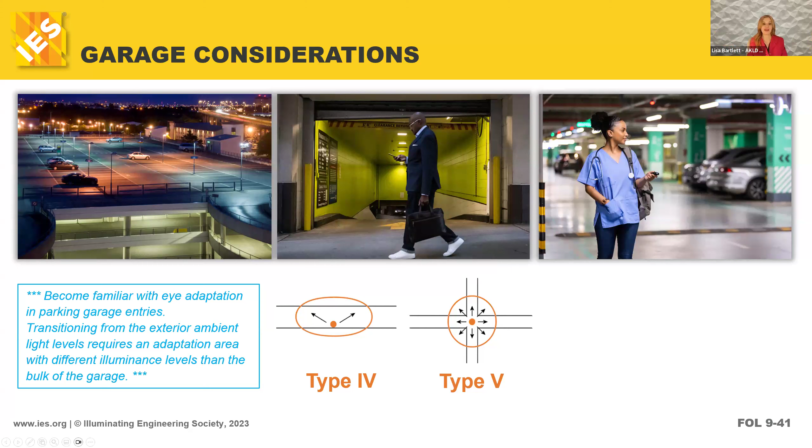Athletic facilities. What I will say about this, have you gone through any of the discussions about visibility and contrast? That's come up. Okay, awesome.

So for lighting athletic facilities, one of the biggest things to consider, in addition to light levels and color temperature, we want high CRI. We want the color of whatever the ball or athletic device is to be really accurately rendered. So we do want good CRI, and generally cooler color temperature works better for athletic facilities. We get more crispness and a little bit more of that daytime visibility. So it's one of the few places in the nighttime environment where you would hear me advocating for cooler color temperature.

Glare is hugely important, and light trespass. Boy, with sports lighting it kind of comes with the territory that there is going to be light trespass, but it's quite a specialty, making sure that we've got good coverage, and we want broad uniformity without gaps. We don't want bright, dark, because a ball moving at speed across that is going to look like it's strobing. So we have to make sure that we've got uniformity.

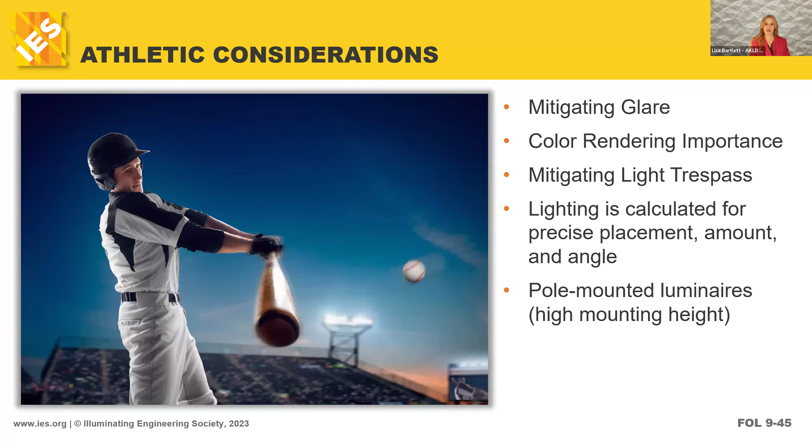All right, facades and landscape. We're cruising along, guys. Almost there.

Such a wonderful way to create a nighttime environment. We can light the exterior environment using largely facade and landscape if we want, if we have something that's more hospitality focused and we want lower light levels. So what kind of environmental concerns would you call out around doing facade and landscape lighting? What sorts of things do we want to be thinking about? Dark sky?

Absolutely, Brittany. Yes, whether we're uplighting a facade or uplighting trees, dark sky is indeed a consideration. And we can solve that by making sure that we're capturing as much of the beam as possible on, for instance, the vertical surface of a facade, so the right beam angle and the right aiming. What else? What other environmental considerations do we have?

How about light trespass? We want to be careful about that. So light that's shedding across a property line or going into windows, especially near houses or dorms or apartments, we need to be really careful there. And also, again, trees and plants need sleep too. They need darkness. So if we are choosing to illuminate landscape, best practice is to make sure that we are controlling that light off by midnight so that the plants have a chance to have some darkness as well.

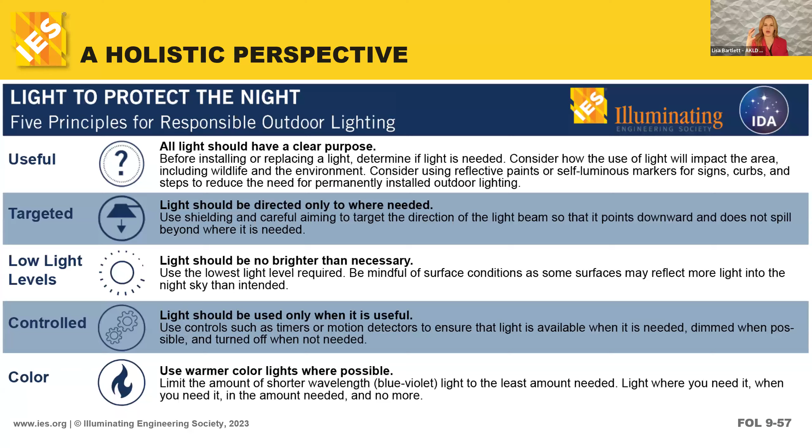And by the way, areas with lower incomes statistically have a much higher likelihood of light trespass. So there's a consideration around lighting equity. I think there's a shift in the political environment where there's less conversation about that, but with irresponsible lighting, there's actually an undue burden on those at a lower income level. There's a lot more light trespass adjacent to neighborhoods that are at a lower income level. So give that a little bit of thought.

All right, now we're at our wrap up. We've talked about so many things. I know this was a sprint, since we had a little bit of interior lighting left over. We all have so much that we want to teach and share. But we did talk about some of the conflicting values, and some of those hugely important considerations around visual comfort, uniformity, managing glare, visual composition and the ways that we can do lighting at night and still have it be a design exercise. It doesn't just have to be about safety, unless it's roadway lighting, in which case, yes, it's just about safety.

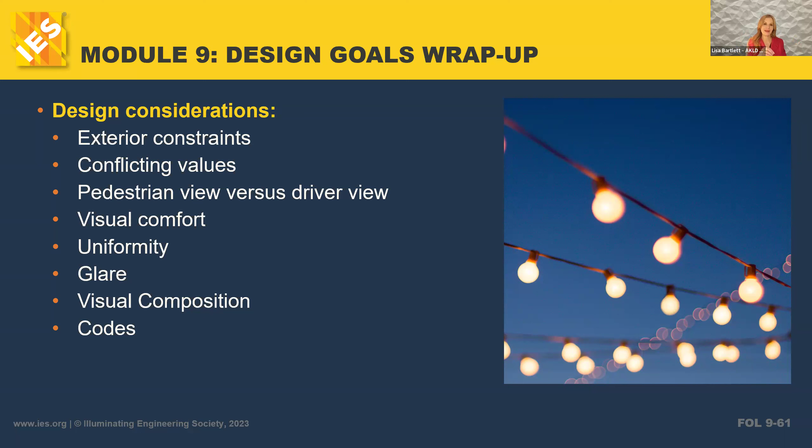We did talk about codes. Remember that you want to be familiar with the codes that are applicable in any given municipality, and that might not be a city, it might be a county, it might be both. So don't just rely on the IECC or ASHRAE in terms of energy code. Make sure that you understand lighting zoning and zoning codes that might apply.

And then for luminaires, we discussed BUG ratings. I want you to study those and be familiar with what those are and how those relate to lumen outputs and distributions. And we certainly talked about the IES classifications of Type 1 through 5. Get to know those. Please play with those in photometrics. Repeating the 5 principles for responsible outdoor lighting. Hugely important. And with that, that is a wrap on Module 9, Lighting for Exterior Applications.